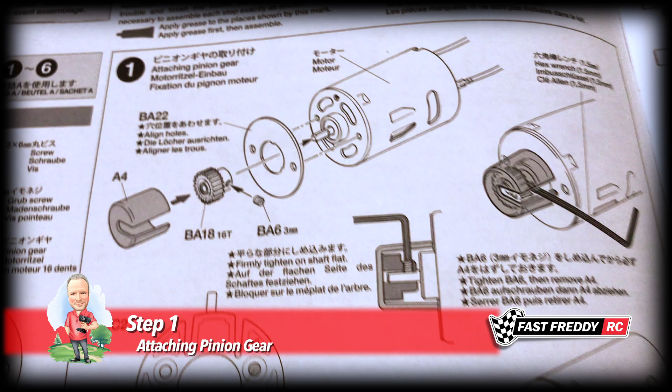So if we turn to step 1, we're going to be working with the motor right away. I'm going to pull all these parts together and we'll get started on this step. So I've pulled everything together.

We've got our screws, the grub screw, and the pinion gear. There is an optional one, but I'm going to stick with the stock one that the kit comes with. We've got our motor plate, and then of course we've got this piece, which is going to fit into the chassis, and this piece here, which is going to help with placing the pinion.

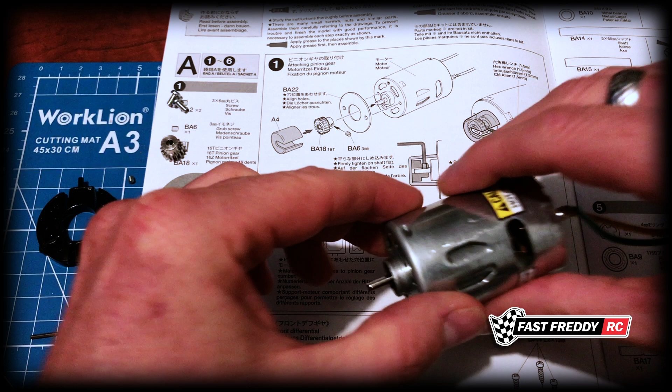So if we grab our motor, we need to put on our motor plate, and you can see the alignment there. So if I grab this and put this on, just push it into place, and line it up with those holes.

There we go. Then the next thing is we've got to put on the pinion. The way I like to do this is I will put the grub screw into the Allen key, and then get it started into the pinion. That way it just makes it a little easier to put on.

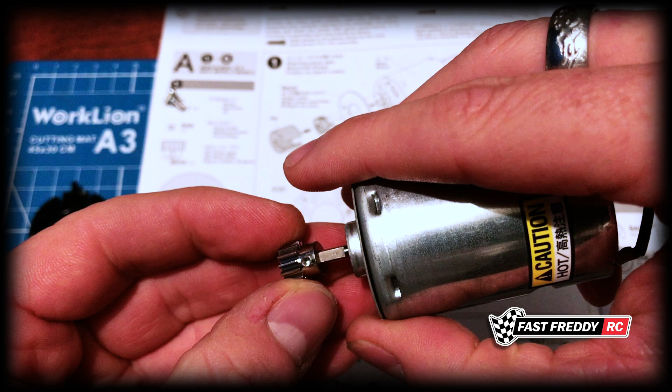And of course, you've got the flat spot on the motor, so I want to put that on and lock it in enough that the grub screw isn't going to spin all the way around. So if I stick this in and start to screw it down, there we go. So it's on enough that it's sitting on the flat, which you need.

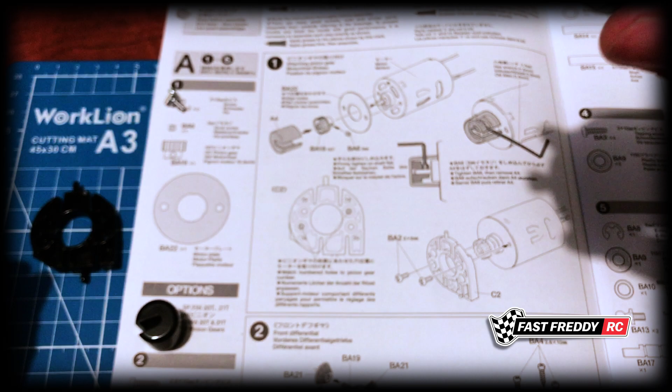So then we've got this piece, which is going to help with the placement. If we put this over top, you can see that it needs to sit as far down as possible, but the pinion needs to come up right to the end of this. Let me check that's correct. Yes, it is. So now I can start screwing that in, because now we know that's in the right placement. See how that pinion's resting right on the end of this?

We now know that we can screw this down all the way and know that's in the correct place. So I took the cap off and really tightened it here. You can see there's not much of a gap there, but this really helps to make sure that you get the placement of the pinion on properly. So we can now move on to the next step.

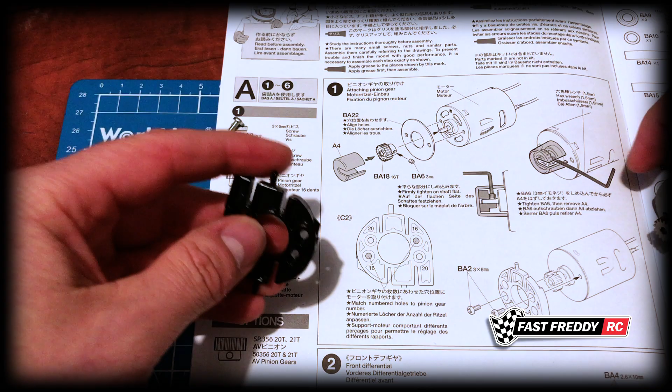Now you can see with this piece, in terms of the design, you've got the 4 holes, and you're going to want it facing this way so that you see the little triangle pieces there, because this way you don't have any of that, it's just flat.

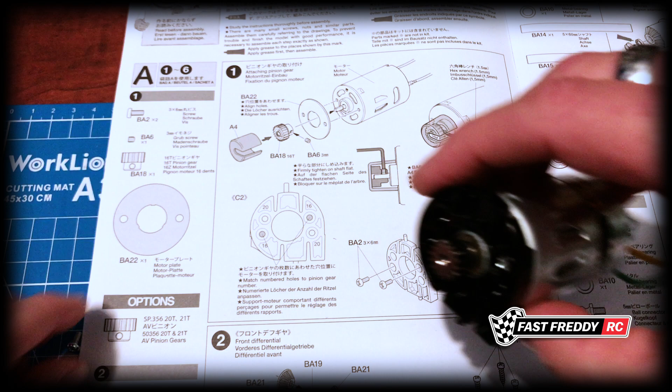So as you can see, we're going to use the one that it came with, which is a 16 tooth pinion, and for the 16 we need to go to the top one, going onto this side here, which we can start to screw in. Then we've got our other screw, same thing, but now we're going to be placing it in the bottom hole on the left hand side, and we'll screw that in.

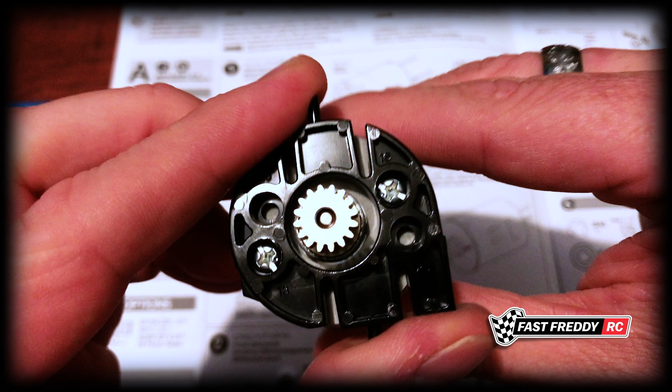So depending on what pinion you use, it's going to determine how that's going to be placed into the motor, but that is what it looks like. So if I tighten this up now that we know that's where we want it, that is how this is going to look for step 1. So that step is complete.

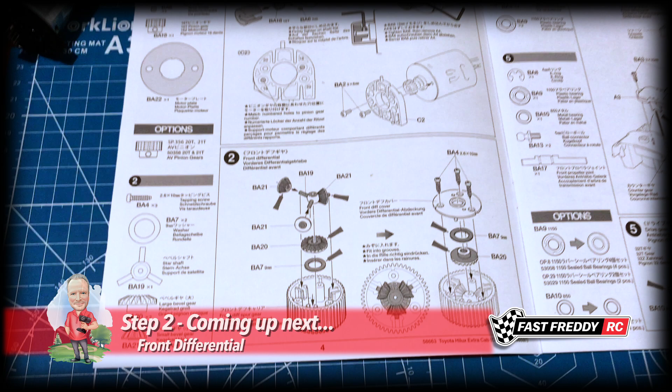So now we're going to move on to step 2, which is working on the front differential.